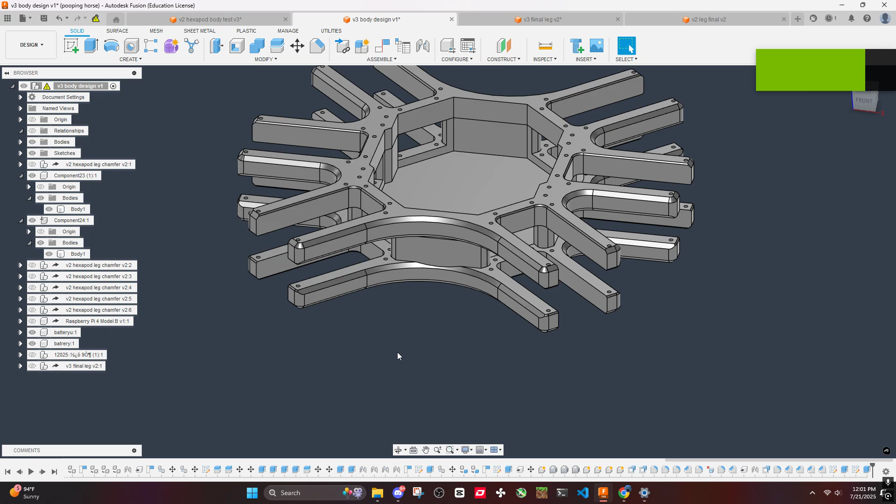Okay, so we have a new problem. Before we do the inverse kinematics, we should probably fix this design issue first. Let's just do a finished sketch for now. So this is a pretty major problem, and it's pretty hard to figure out until you've printed it out, which happened. If you look at these two screw holes, how are you supposed to put a screw through here? You can't put a screw through here.

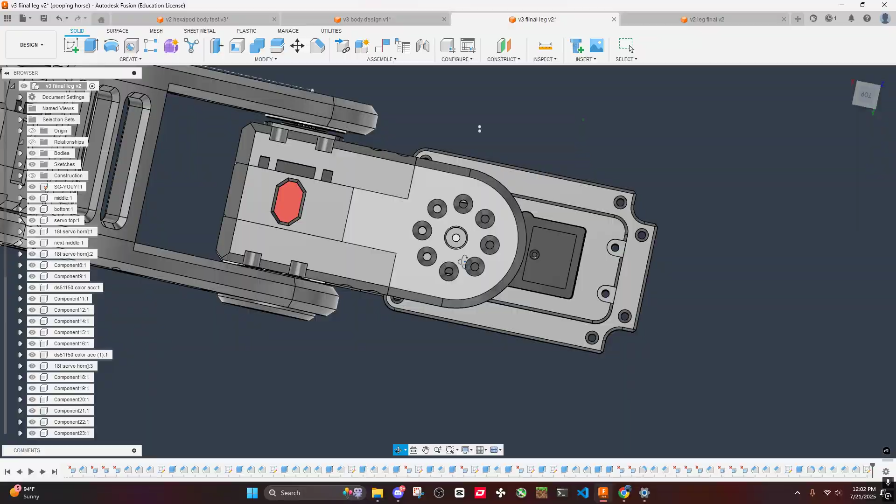So we need to either design something so that we can put a screw through here, like a cutout, or we can make a complete new design here. So there's two options. We can make a small cutout in this, or do what I was talking about earlier. What should I choose?

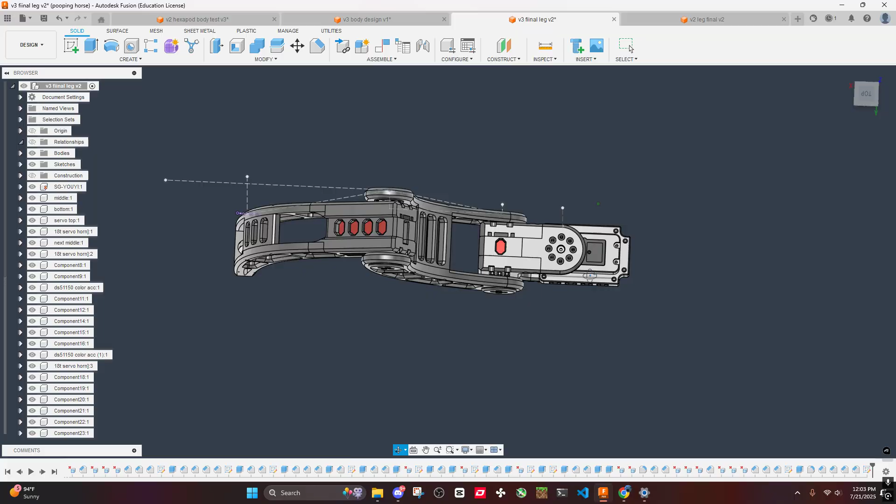I'm not sure, to be honest. I feel like doing this could and would be potentially easier and faster, but it would look a little wonky. So what I think I'm going to do is actually change this design slightly. This will take a lot longer, but it will actually help with the overall structural integrity of everything too.

So what we need to do here is delete all the chamfers here. This is why doing the chamfers at the end and everything else like that at the end is very important. But let's see here. Let's get rid of sketches. This is quite difficult to explain, but I think as I do it, it will make more sense.

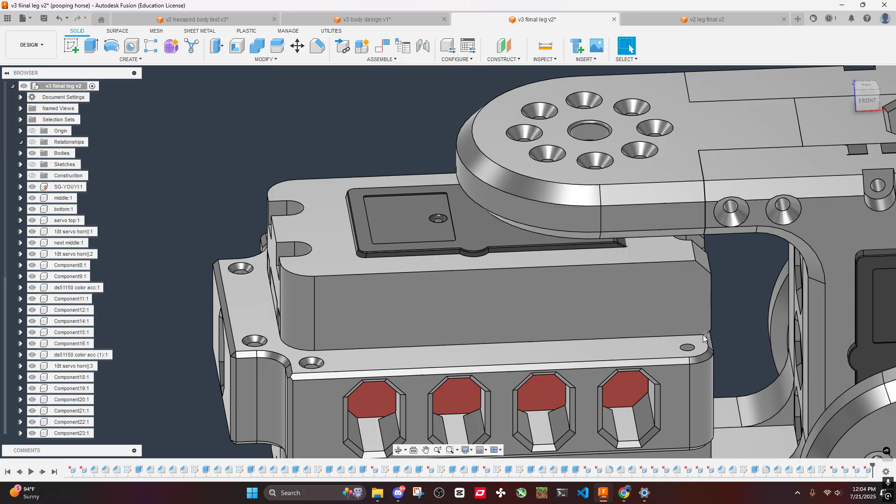Where is that? I'm gonna delete this. Okay, so the design is right here. This is what we need to do. From the inside to the outside should be 13. And we don't need this anymore. Let's get rid of this for now. So 13, let me think.

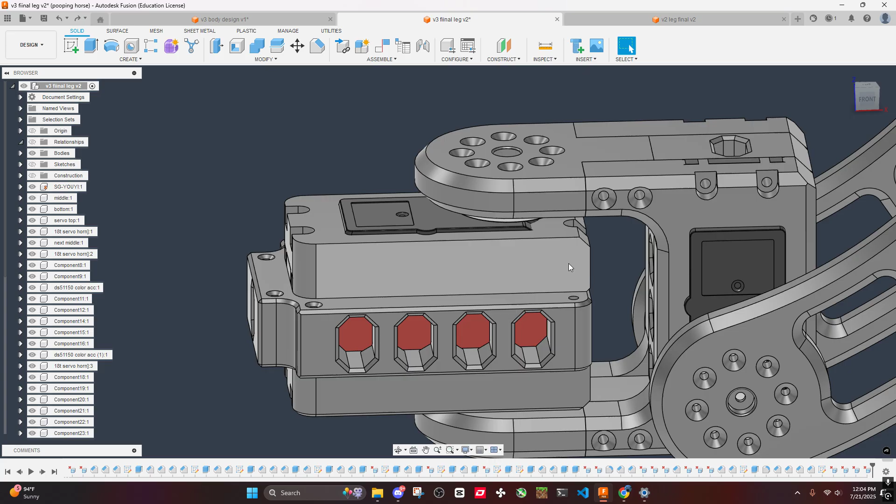So we need to extrude this by 13. 13 by 10, I think, is what we will do. Should we do 10? I think 10 is good. So, create sketch. Pause before we do that. Let's actually get rid of this too. Where's this? Okay. Nice. This is what we wanted.

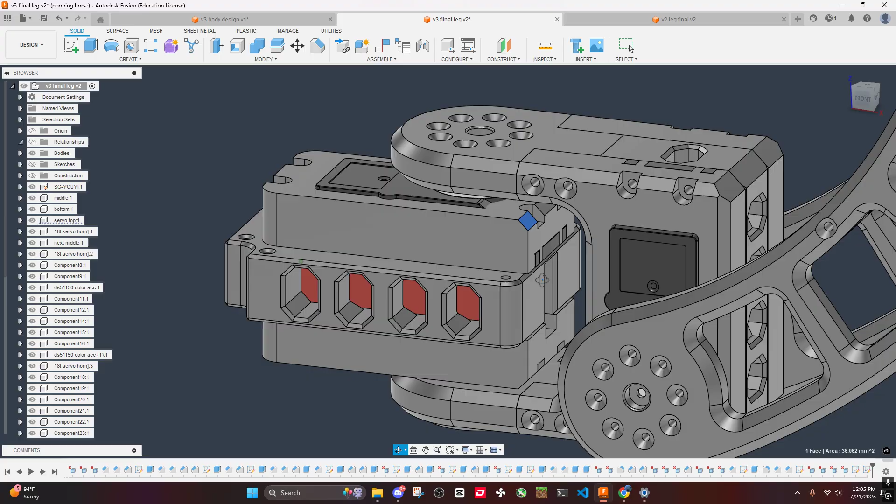Okay, so now let's do a create. Let me think here. We should probably get rid of this too, obviously, to be honest. Yeah, let's do this. Create sketch and okay, pause. Let's get rid of this too then. That's quite far back. Should we get rid of that? Or can we do it some other way? Let me think. We should probably get rid of it. Where is that?

There's a lot of small things that need to be changed for the overall design to be good, and I don't want to cut any corners. There's a warning, great. It's a warning about a compute failed. Okay, where, compute failed? It looks fine. I'm sure it's okay. So now let's go ahead and do it. Let's get rid of this for now.

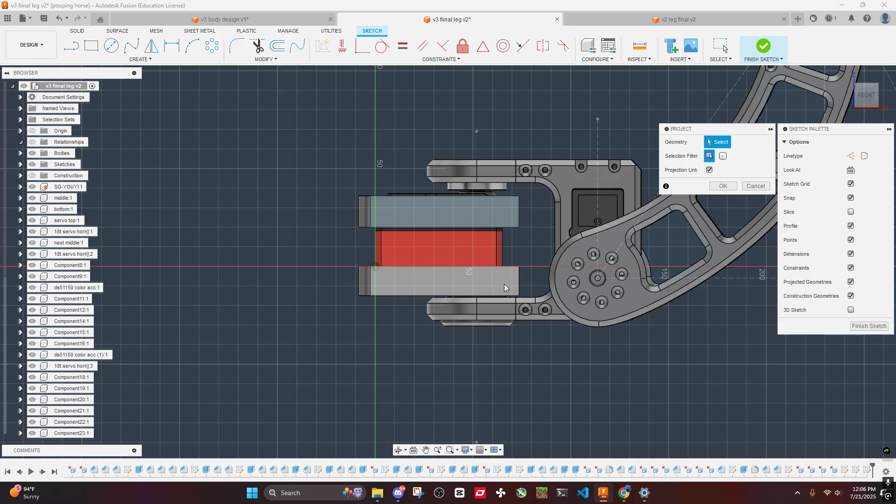Create sketch. Do a project of this also. So let's do it like this and then make this 10. Oh, 10 looks a little short. Should we do a bigger number than 10? I don't think we should. We don't need to because the screws will be harder to come by. I think 10 is plenty. Let's see here. So click.

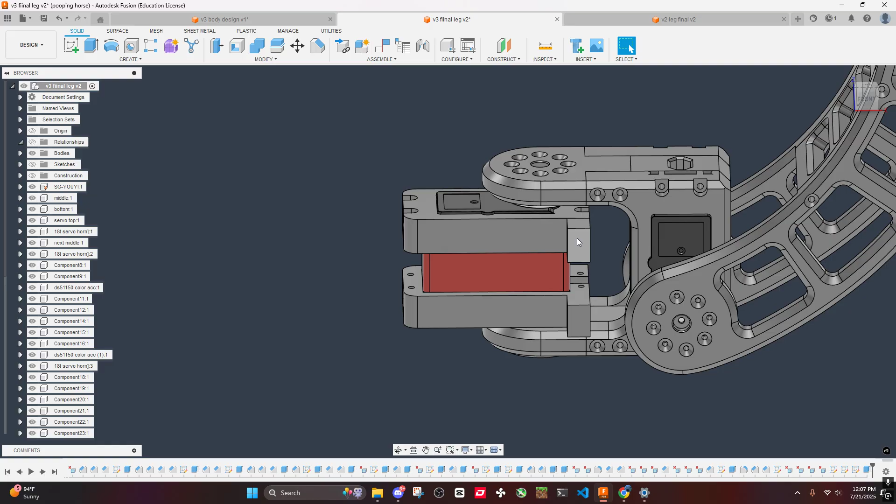Okay, I don't know why it's doing that. That's weird. I don't know why it's clicking the entire thing. There, there. Extrude this out 13. Wait, what did I just do? Why did that happen? Okay, so they're not the same body for some reason. So let's make it the same body, this one and this one. No, the target body is this. This is, okay, there we go.

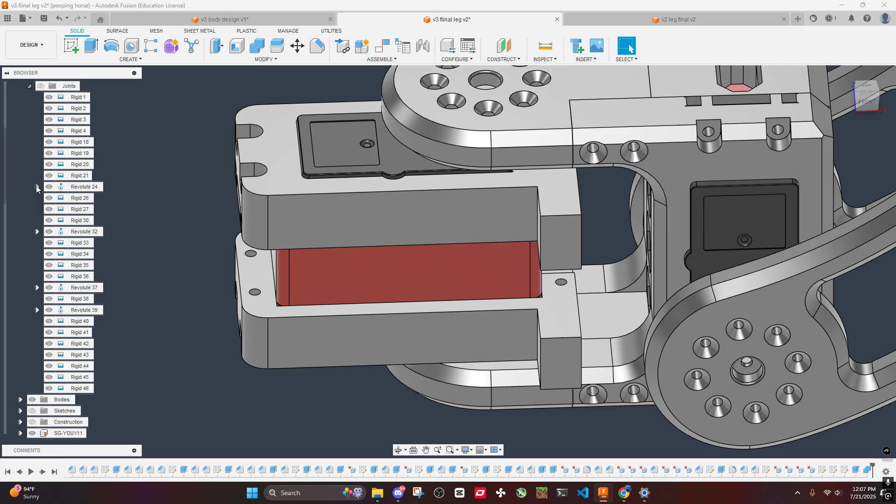This is a pretty interesting looking design. So we'll have fillet of 5. Let's do relationships and make sure everything still fits properly. Should be the first one. Unlock this right here. Okay, so if we did a, let me think.

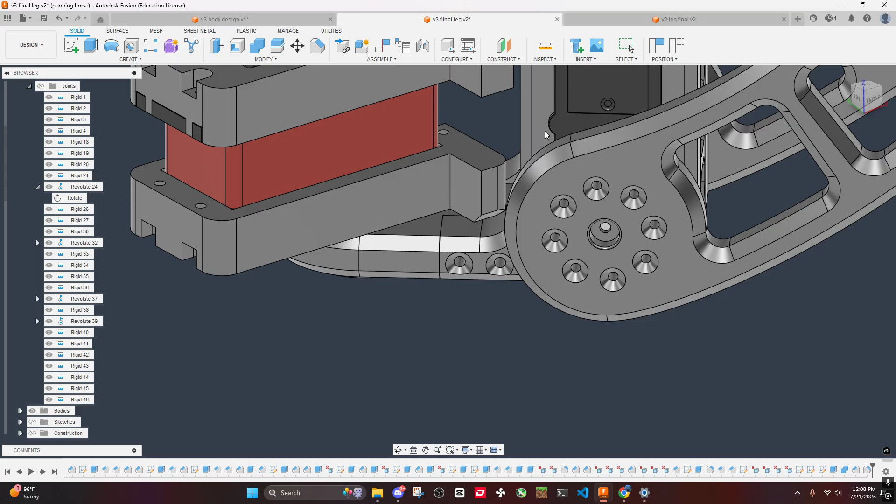The bottom will have a chamfer 3. This has a chamfer, wait, yeah, this has a chamfer 3. So let's do a chamfer 3. And this will have a fillet of 5. So now everything fits just like we predicted, I think. Yep, that's awesome. Alright, so let's get rid of those fillets and chamfers for now.

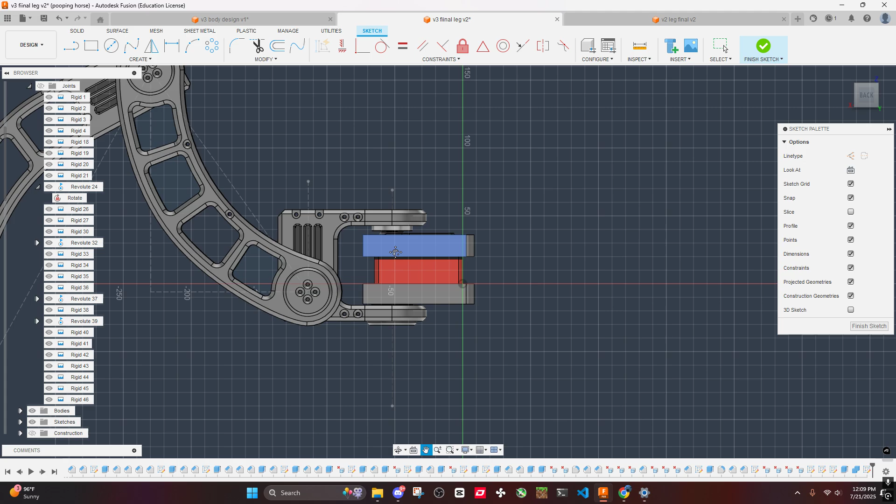And lock it, and do the same thing on this side. From here to here, and we need to do 10. Nice. Let's do project. Extrude 13. For some reason this didn't join again, which is not what we want. But there we go, fixed it. Easy, nice.

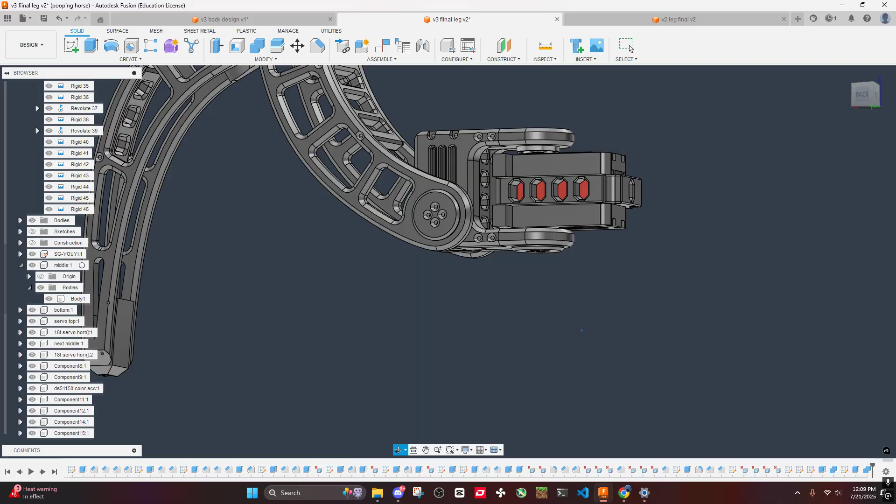And now we can, where's the middle? Middle, bring back this body. Okay, let's start. Okay, now that we have this, let's not do anything yet. But let's fix this design, which is gonna be a pain.

Copy, paste. Copy, paste.

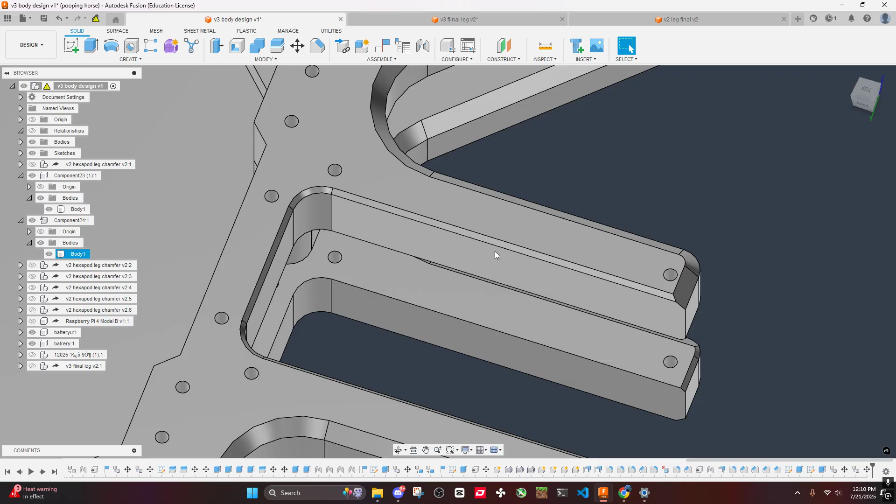Alright, let's just start fixing it up somehow. Should probably get rid of all this. Should we? I actually don't think we need to. Let's do a create a sketch. Okay, wait, this might actually not be that difficult, I think.

Let's see, so we need both of these to mirror everything. Yeah, this is actually not that difficult. What we can do is just something like this. Go from here to be 10. Okay, yeah, this is not bad at all. Okay, what is this?

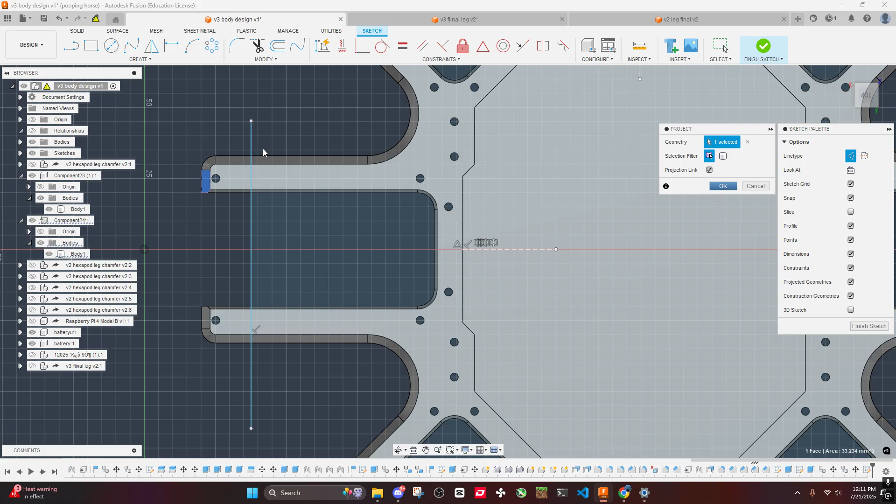So just mirror this across here, and then mirror this and this across here, and then do one more mirror. Before we do that, we need to create a, we need to do a project. This to this, 10. Okay.

So now we can just do mirror this across here. Okay, that's not what we want. This is what we want.

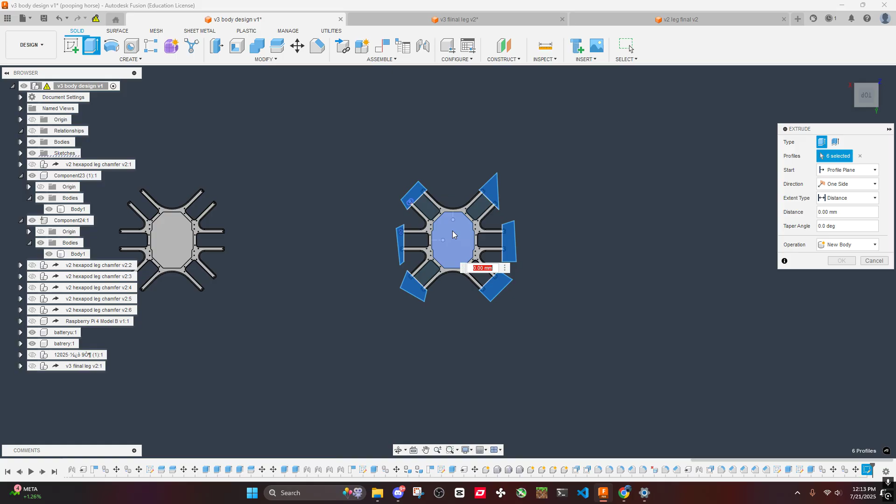Make all of this construction. So now we can select everything and just cut us straight through all of my hard work. Oh my goodness. Okay.

Alright. This should actually make it stronger too because it's now shorter. My goodness. Okay. Great. Look at this amazing, absolute amazing thing that I did here.

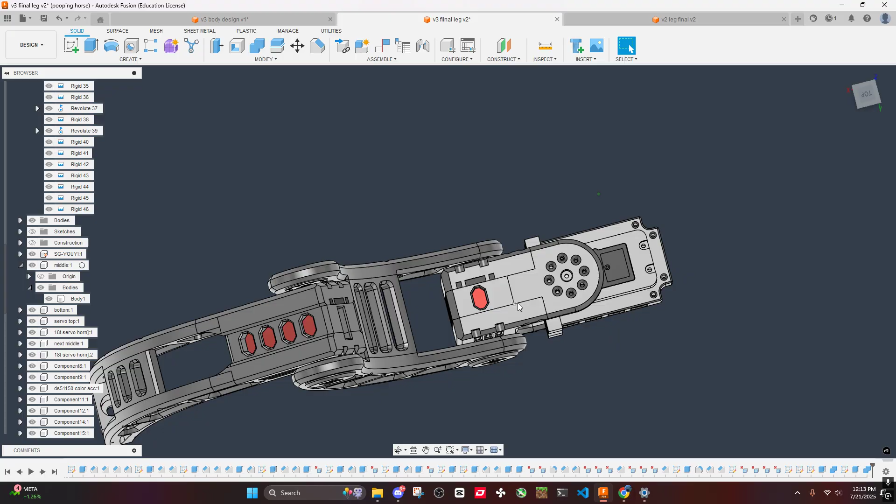I don't even think we need chamfers or anything on any of these edges, except for just do maybe like a, I think doing a chamfer of 1 will be good. So that'll just attach to here, and then we'll have, see what we can do is we can move this out of the way and screw straight in this way. Yeah, that should be pretty strong too, I feel like.

Okay, so let's check everything one more time. From here to here is 16. From here to here should be 15 now, yep. So let's check, wait, what am I looking at? This one. The top, this should be 16. Yep, this should be 15. Yep. And from here to here should be 13, and this should also be 13.

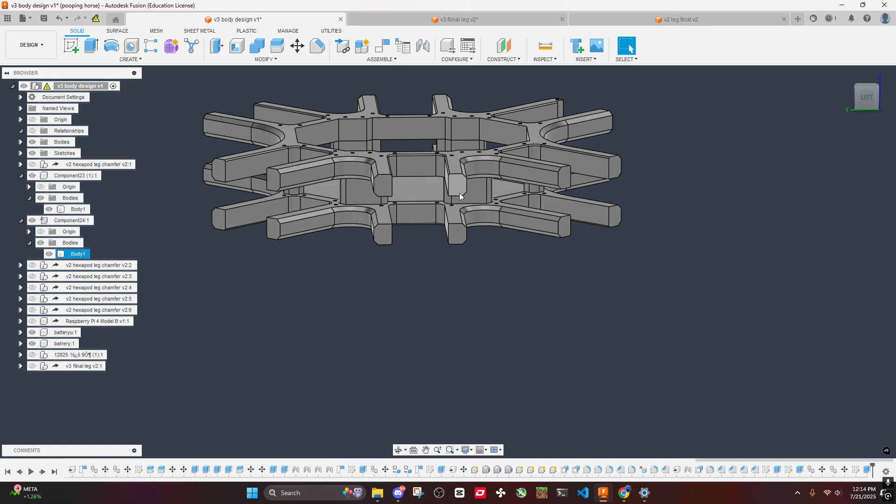Okay, so in this case, we can just go ahead and, okay, I'm trying to think what I need to do. I'm trying to think, should I put the hole all the way through? Would that make it stronger? Oh, add more walls. I think it would actually be stronger. Let's see.

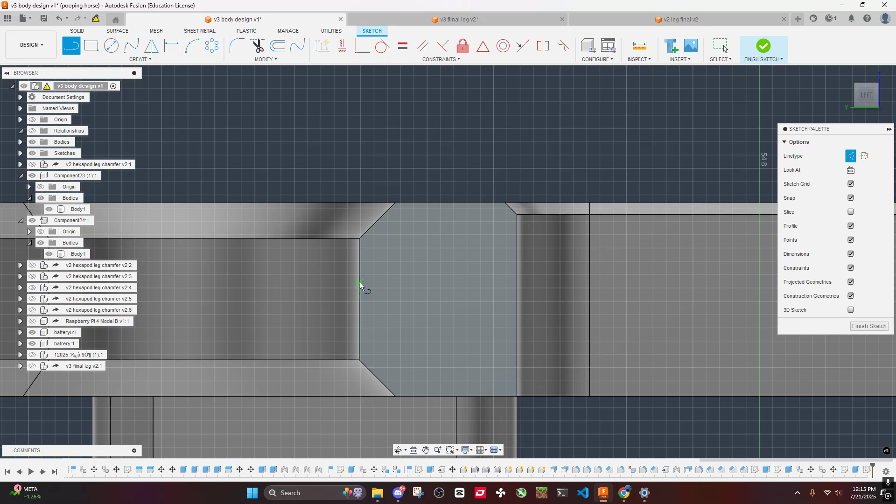So the question I'm wondering is, should I do it like this or like this? Or just go until right here. Would this be stronger? That's a good question. Okay, so we're gonna have walls, walls, walls, infill. But if we did this, we'll have walls. Okay, I think this will actually be stronger. This will be good for us.

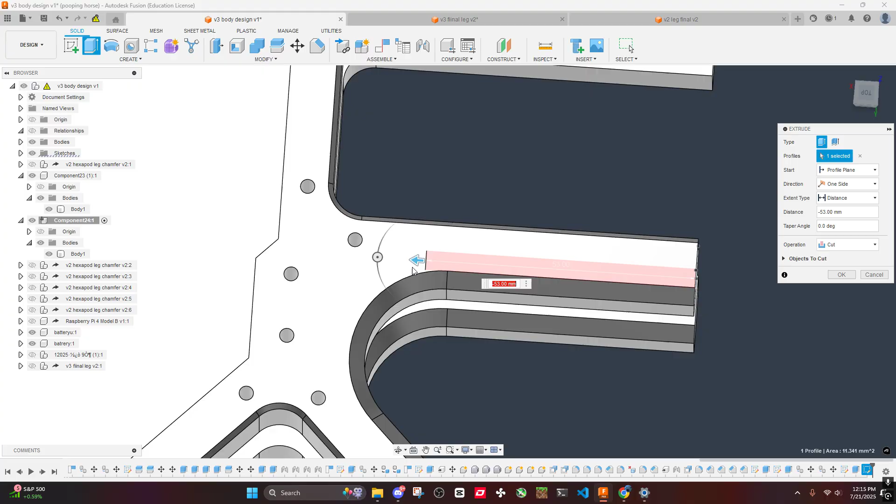To extrude this all the way through, and we can perhaps even mount something on the inside, which we can't, because this is at a wonky angle. So maybe we can. We can have something here, and then we mount it. Okay, let's go. Yeah, let's just go all the way through, maybe.

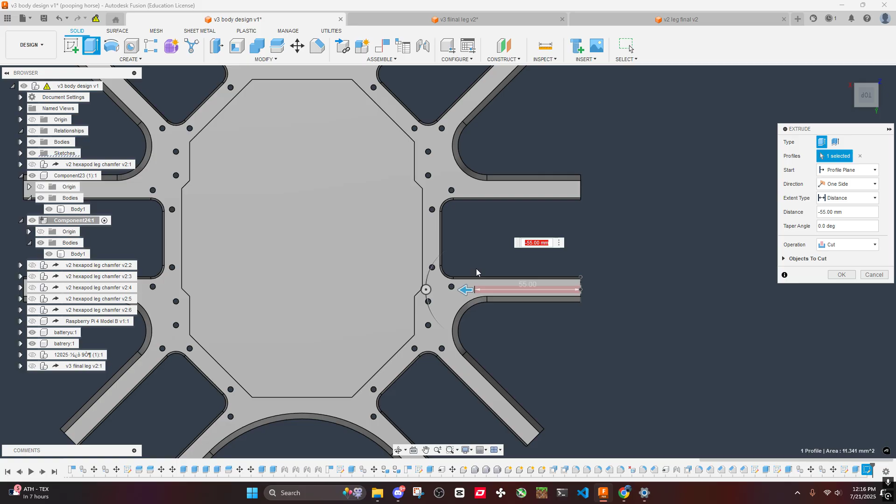Or maybe we can just do like 60, where we're somewhere around here. Negative 55. Maybe somewhere like here, because I feel like if it breaks, it won't be like right here. Break right here. So if we go past this point, negative 62. Negative 65. Negative 60. I think negative 60 is good.

Yeah, let's go ahead and do that on all of them. Project, project, project. Click OK. Let's see, can we go from here to here? We can.

Why do we need to do that? Okay, so we can find the middle. And then we can go from this point to this point and find the middle here. Mirror this across this. And then mirror both of these across the middle.

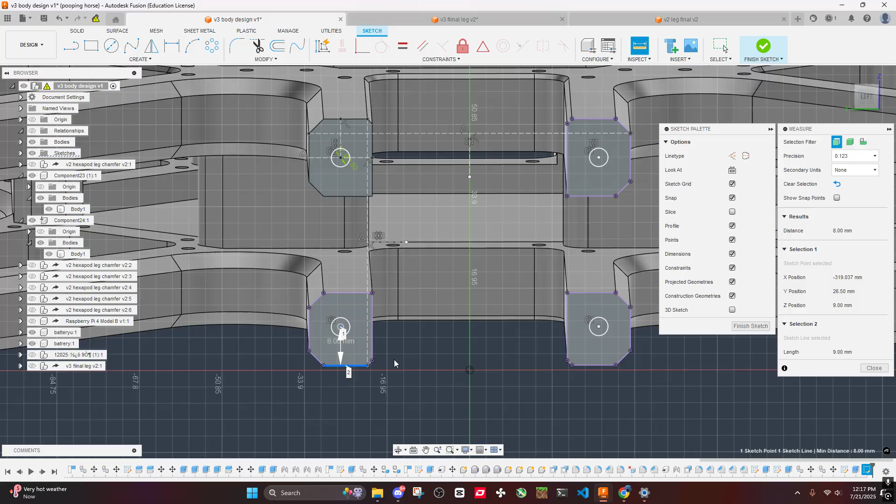Okay, before we do this, let's check from here to here, 7, here to here, 8. So that's not correct. Something is off. Here to here is 8. Here to here is 8.

So why is this? Oh, wait a second. Wait a second. We can't mirror this across, I don't think, because that won't be the center. Okay, that's not what we want. We don't need this or this. I think we're just gonna have to do it manually. No, that's not what we want. We want to do it on... This isn't the center either.

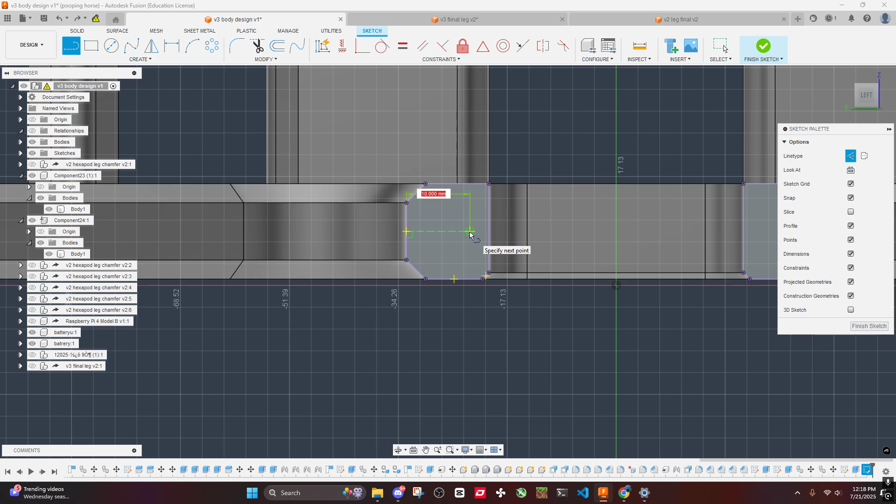Wait, no, this is. Okay, so we need to do it like this. We can't do it on this line because there's not a fillet here, there's a fillet there. So we need to do it here. This is why you need to do the fillets after everything. Which is kind of annoying, but I guess this is okay.

Now we can mirror this across here. Looks pretty centered, looks pretty centered. Yep. Now let's select everything. Extrude at -60. Where is everything at? Okay. Yep, that looks pretty good. We can click it OK.

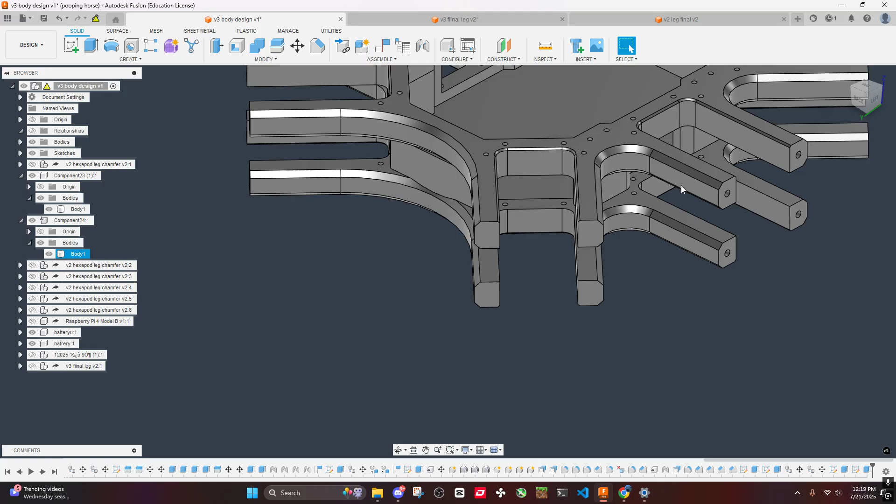Okay, now we need to do this. Can I just extrude it all the way through? Would that be easier? I think it would be, so we don't have to do it on the other side too. Either way, we gotta do it here though.

Extrude. Yeah, I think I'm just going to go all the way through with it. This will make it a lot... Okay, that's not what we want. That's a pain. Alright, let's just extrude it here then, and then we can do the same thing here. What? Oh, I need to get rid of this and this.

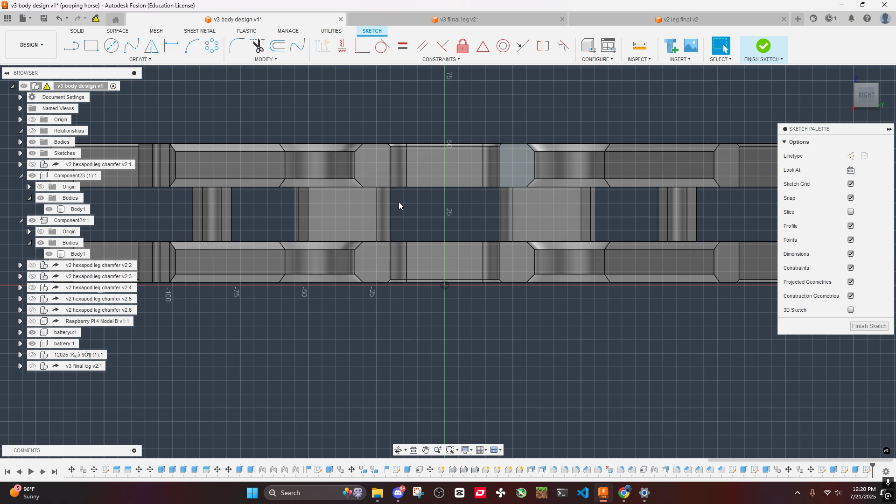Okay, before I do everything, let me finish the sketch. Go to this sketch here, and can I copy? Imagine this works. Okay chat, just imagine this works, okay? And then I can go to this sketch now and do a paste. Dude, no way. There's no way. I could have done this all along. Are you kidding me? There's no way that worked. Dude, what?

So all I have to do is just... Oh my goodness. That is crazy. There's no way. Wait, what is this wonky... what is the... Oh, I forgot to...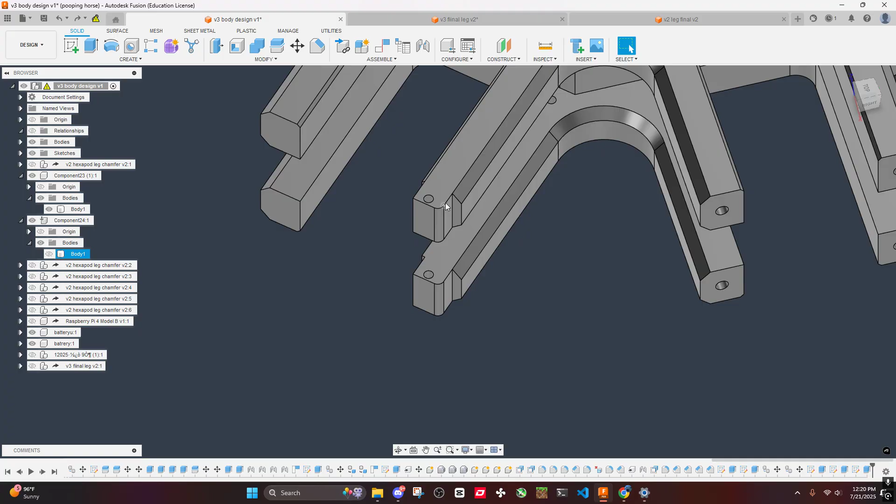Huh, okay wait. Not here, I think it's before this. Okay, where did I make this happen? Here? So I forgot to select this. Now I should be good.

Okay, if I do this and it works, I'm actually gonna be so happy. Where is it? Right here. Control paste. Where is it? Okay so...

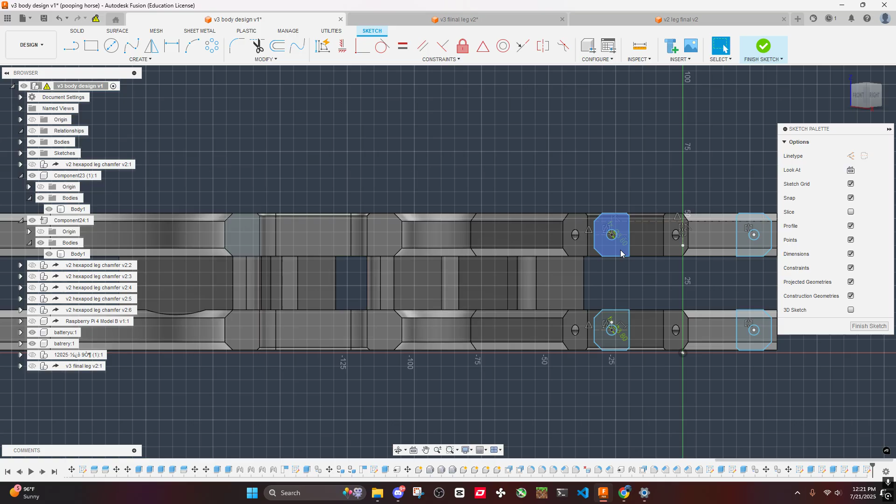Is there a way we can line it up? Okay, that's not what we want. Okay, control paste. Okay, so it should be on the same plane. If I can just line it up. How can I line this up? Because this is not lined up.

Negative 137. 136. 137. 138. Okay, so let's see if there's a way I can do point to point. Maybe this is what we need.

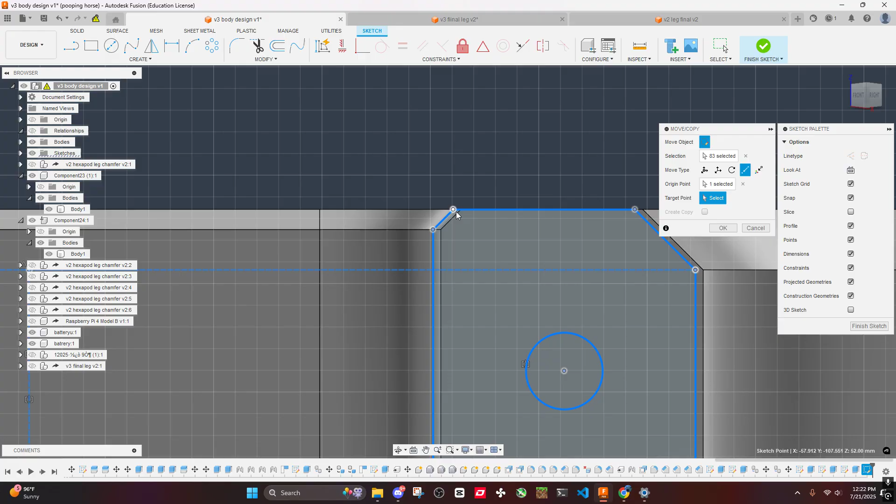Origin point would be this. Target point would be the... Oh my, wait a second. Wait a second, did I just... did I just big brain? Pause, did I just figure this out for real? Wait a second, wait a second. This is amazing discovery. I definitely need to start knowing stuff like this is obviously there because there's no way people are doing what I was doing, manually doing everything instead of they can just copy and paste.

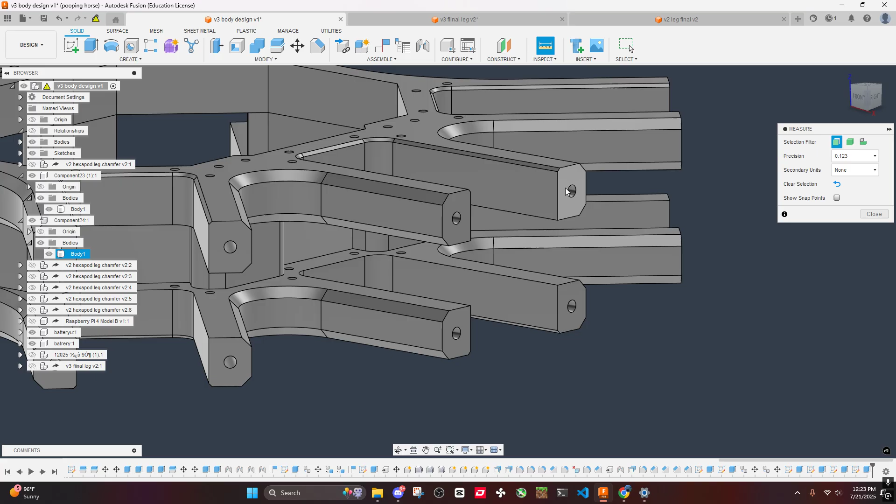Okay, let's actually check. This to here is 6.1. Okay, if this is 6.1, everything should solve. 6.1 and 5.6, 5.6. I actually, 4.6. That seems like a pretty normal number. Dude, that is crazy. All right, let's just go ahead and do all this with the same method, control paste.

And then now we can do a point to point, point to position, point to point. So the origin point, we want this point to line up with this point. Wait a second, that didn't work. Why did it go all the way over? Hello? The heck?

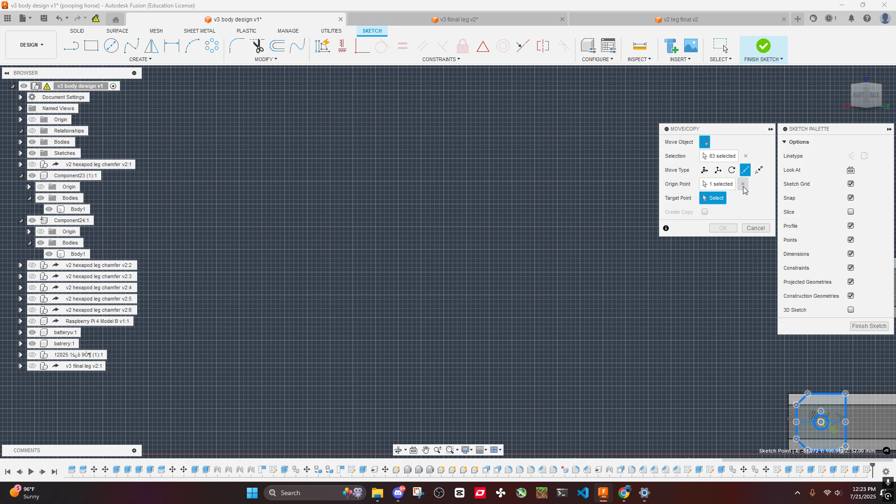Okay, let's delete this. So the origin point, we can just select this point and do this. Okay, that works too. Nice, okay.

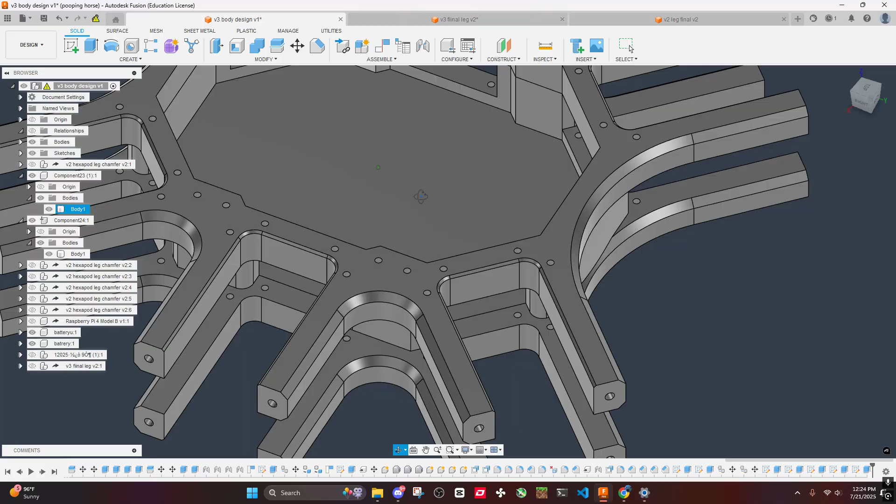So you're telling me I could have done this entire time and I didn't. I kind of knew that something like this is possible, but I just couldn't be bothered to do it, which is not a good mindset. You always want to innovate, always want to improve anything with design, efficiency, blah blah blah, which is what I'm doing now.

Extrude to negative 60. This is going quite fast, now that I figured out I can do this.

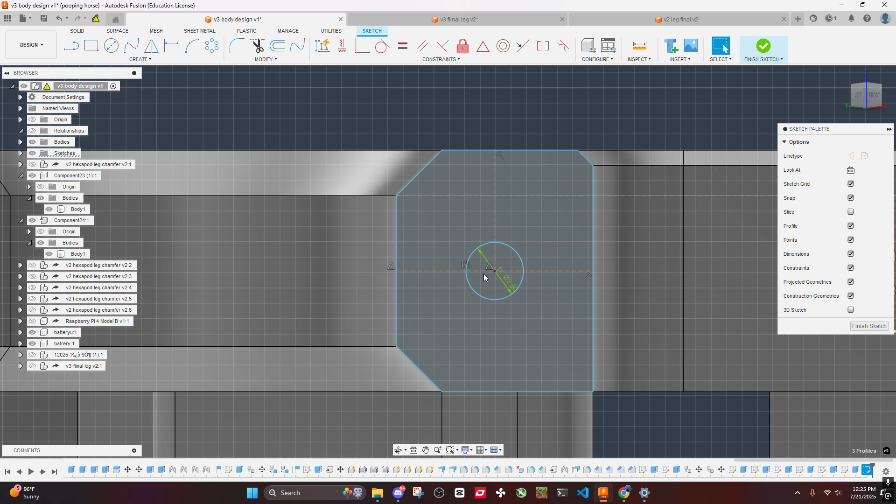Dude, I love CAD, man. I love CAD. Imagine designing all this by hand. Like, how are you supposed to do that?

Everything looks awesome. Okay, now that we have this, let's go ahead and let's see.

We need a chamfer here, chamfer here. Wait no, let me think. Yes, chamfer on all of this. Do we need a chamfer here? We should probably add one here. No, we don't need one here. We don't need one here either. Here, here, here.

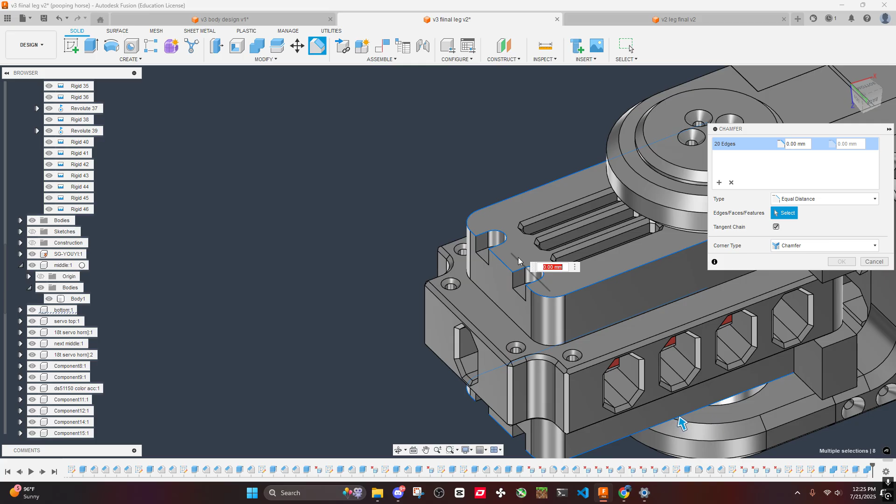Chamfer all to be one, I'm guessing. We're gonna add it here and here to prevent elephant foot. That's a good idea, that's a great idea. That's a great, great idea. Did I do that before? I don't even remember.

Here and one. Awesome, okay, nice. So here, here.

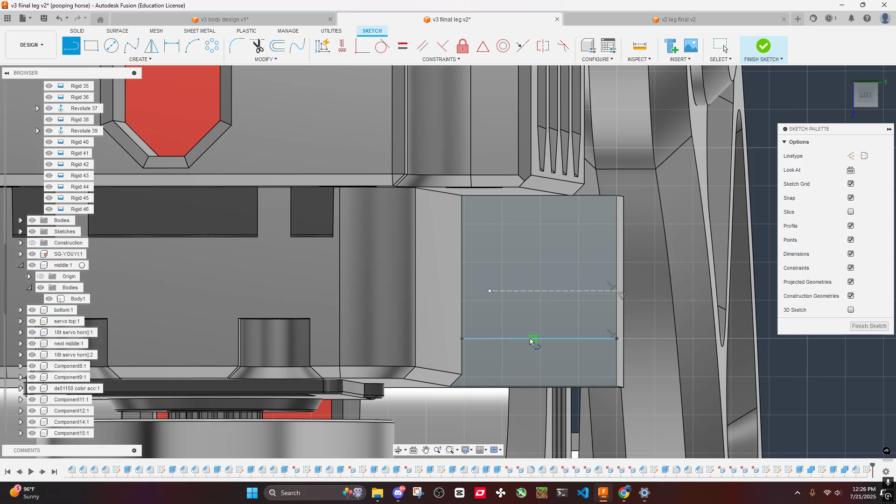Wait, before we do that, let's actually do the... okay, so let's do a create sketch. Okay, let's see, what do we need? Like this. And then like, I'm guessing from here to here. And then from, where's the midpoint? Right here to here.

This needs to be M3. M3. I guess we can just mirror this across. Let's do it right over here.

Okay, now we can mirror this across this line. Nice, and then we can't mirror across here, so let's go ahead and project this and find the midpoint.

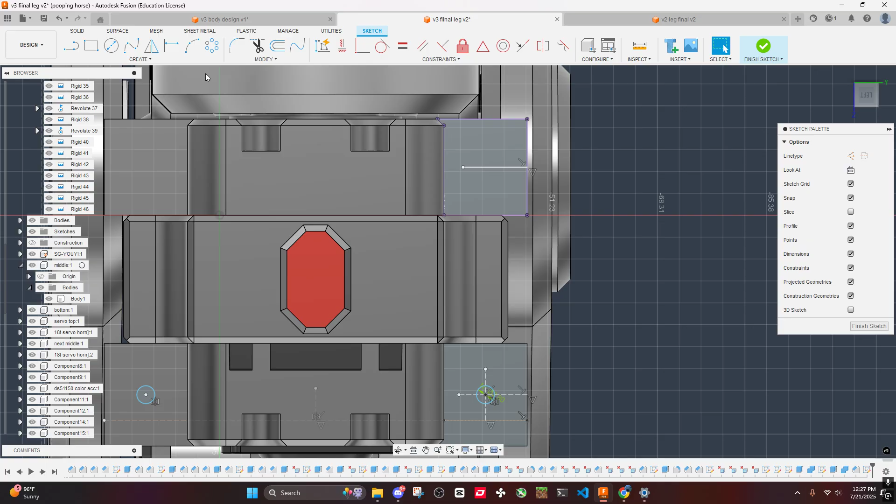Yes, why did I just delete it? Project it here, and to find the midpoint we need to go from here to here, which we can just use this, I think. M3. Okay, I think this is good.

Okay, now let's mirror it. Mirror this across this. I'm going to do from here to here. It looks like 90. Okay, that's perfect. 90 degrees, that's what we want.

Extrude, extrude, extrude, and extrude.

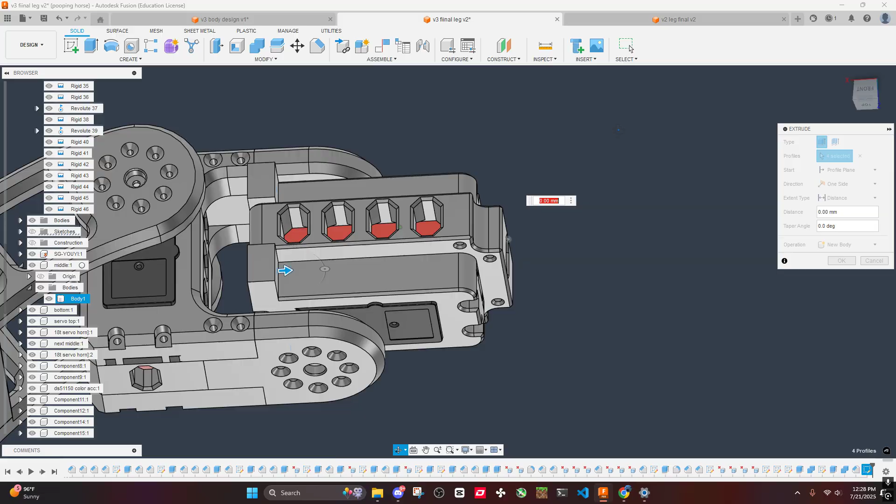Now I just need to check if everything's centered, 6.6. I think that was 6.6 on the other side too. So 6.6. Now this should be like a 4, 5.1. Wait a second. 5.1, is that what it was? 4.6. Why is this 4.6?

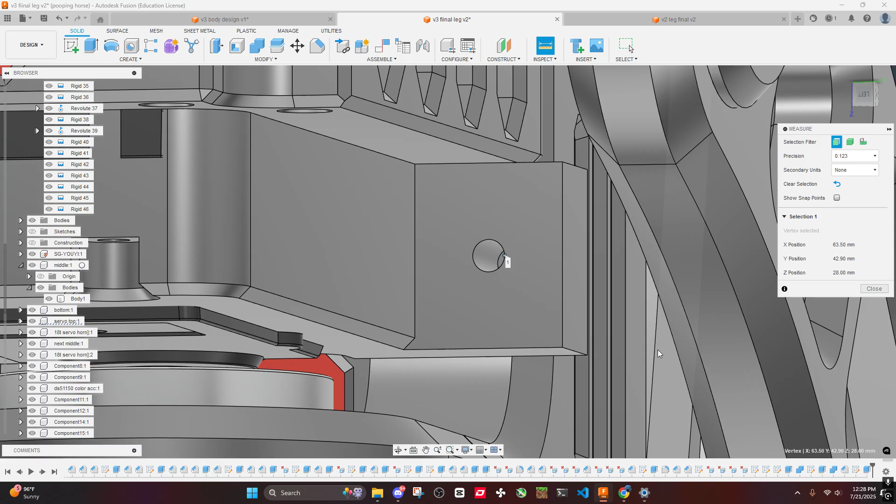Huh, so there's some discrepancies here. Obviously. That's strange, this should have lined up. 5 point... that is so weird. Okay, wait.

From here to here is 13. From here to here should be 13. Okay, then why? Oh wait, these holes are different sizes. Oh my gosh, I'm so stupid. No wonder. This should be smaller than the other one because this is a... okay, yeah, this should work then.

Okay, so let's do fillets and add everything. Fillet, fillet. I was genuinely a little concerned and tripping out. This should be 5.

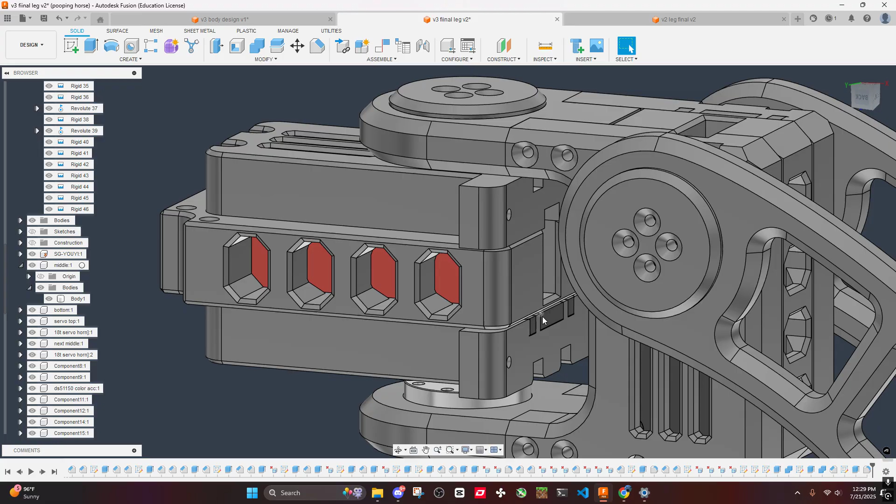And let's see, chamfer here. Okay, so let's do chamfer. Chamfer. Chamfer, and go on the bottom. Chamfer. Chamfer.

So this needs to be what? 3? I believe. Yep, looks good. And let's go ahead and add the fillet back here. I mean the chamfer back here.

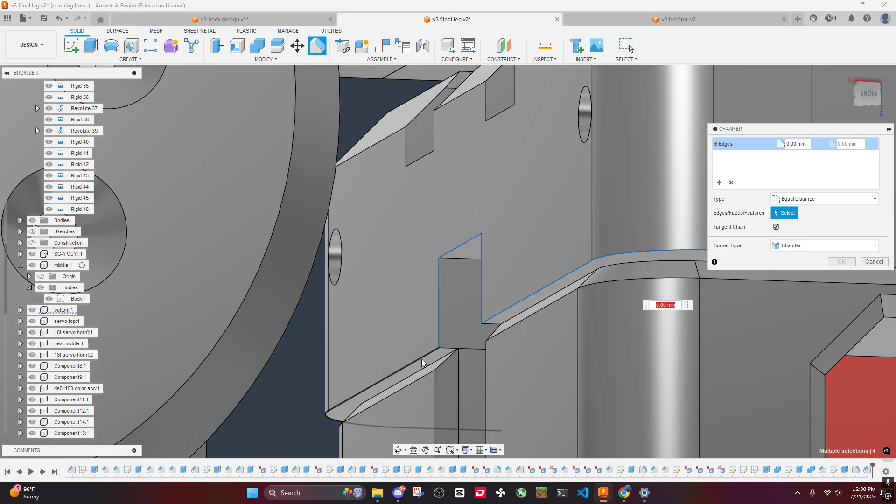This needs to be 1. Okay, not bad, not bad at all. And then the chamfer down here. 1.

Pretty good. Obviously, we need to add some sort of thing. Okay, let me think. Countersunk or not countersunk? I think we should use countersunk here. Can we still do it? We can, awesome.

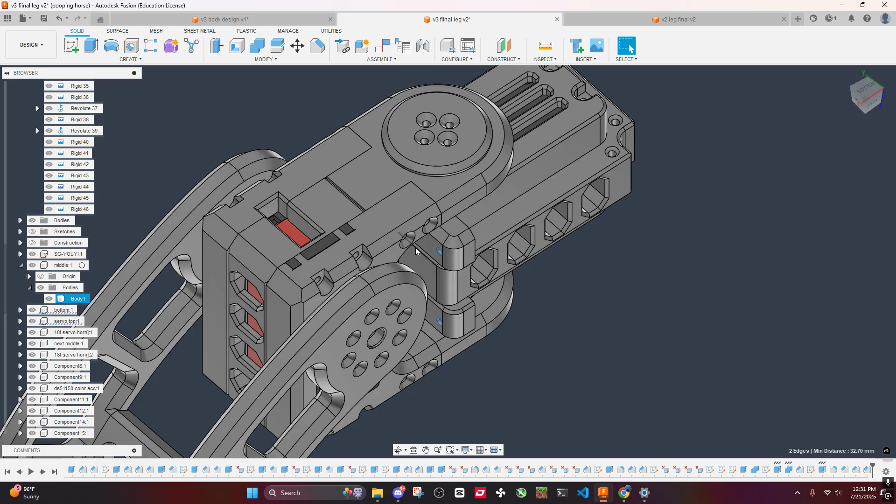Good thing about parameters is I don't even need to remember what it is, and we can just add it. And because I remember adding it in. So M3 chamfer, yep. Okay, I think it actually needs to be bigger than 2, to be honest. Maybe like 3 or something. We'll change that later. Now this goes in here.

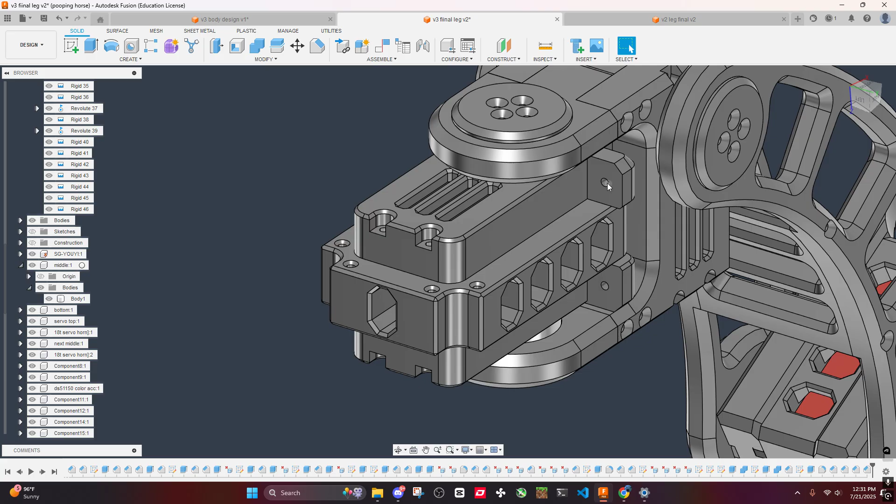And yep, this looks pretty good. So now we should be able to just slot this straight on. Actually, let's do that, why not. Let's see.

Wait, where is it? Oh wait, insert. Let's put this actually. We don't need to put it on toolbar, we only use it every once in a while. So...

V3 final leg, select. Save, save.

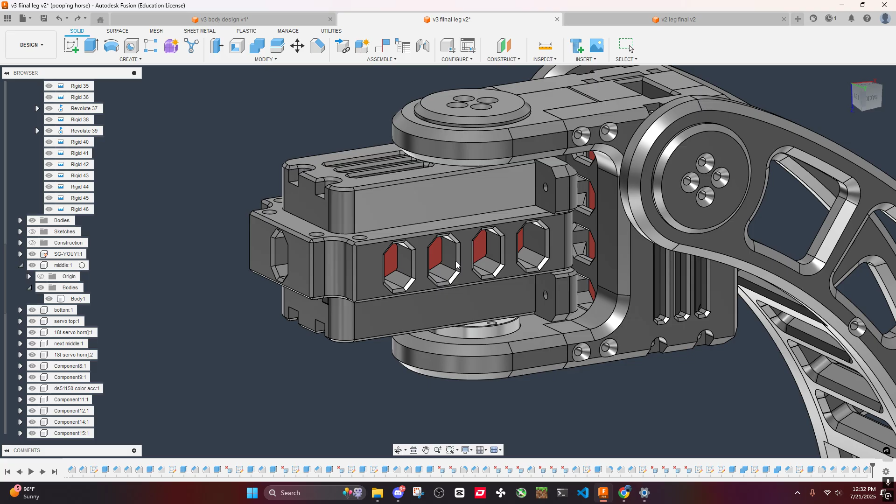This should actually take some strain off of this piece and puts them on the top and bottom, which actually distributes out the force, I guess, the mounting angle perfectly.

Actually, before we do this, would adding a fillet here be a good move? That does look very wonky though. So I think we need to.

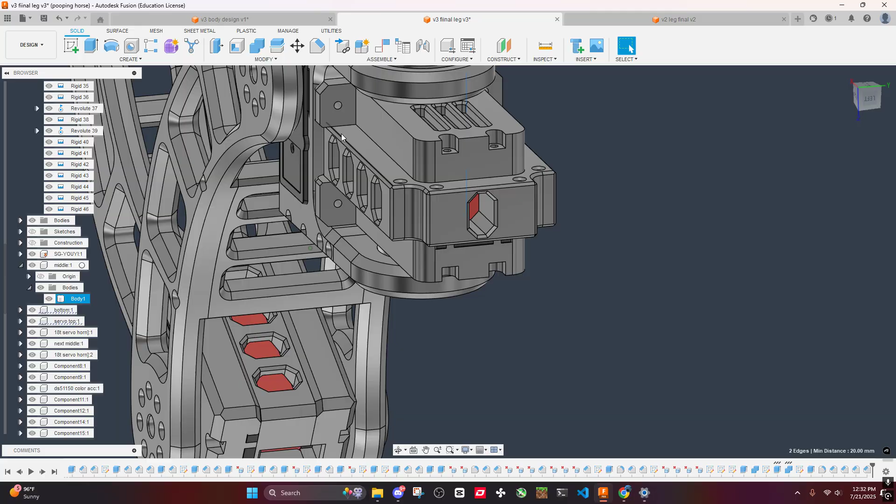Will adding a fillet there be a good move? I actually think it will be. I think it will be. Let's go ahead and delete this then. And add a fillet here and here, so let's do a fillet of 5 and see what it looks like.

So it doesn't interfere with that. And it shouldn't interfere with the bottom either. Okay, this is perfect, this should make it stronger too.

And here, we can add a fillet of 5 to each one of these. So here, okay, let's just do fillet, fillet.

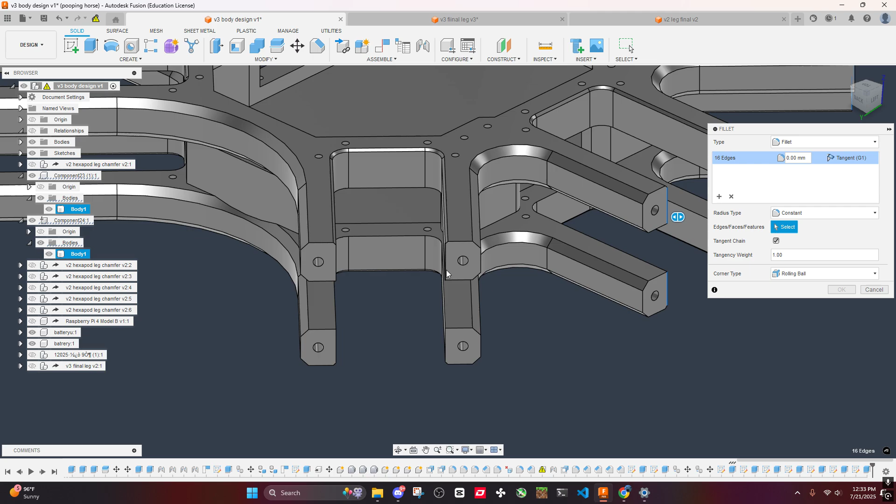And we don't actually need to add any, what's it called, clearances, which is amazing because we can just do a horizontal expansion or a negative horizontal expansion on all my 3D printed parts. That's supposed to slot in here, so it will actually fit perfect. And I found on an Ender 3 or like any Ender series, usually a negative 0.2 is perfect. So we can do a fillet 5.

Okay, why is it not working? Fillet of 5. Okay, this looks very promising. This looks good, I think.

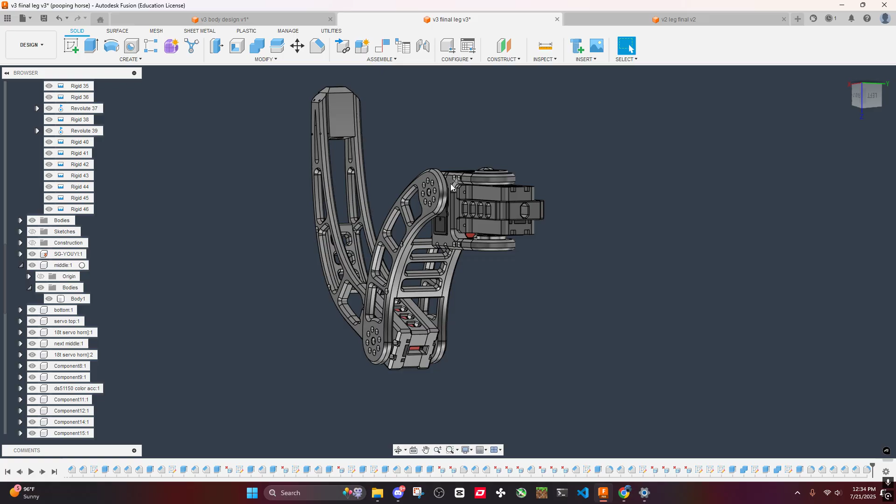And now we can do... that looks good too. So let's go here and construct. Wait, no, what am I doing? Insert. Okay.

Final leg V3, select, and now it's gonna prompt us to save it, I think. Wait, why did it not prompt us to save it? That's strange, is it gonna work?

No, I think I did it wrong. Yeah, I kinda did it wrong. This is the wrong one. So...

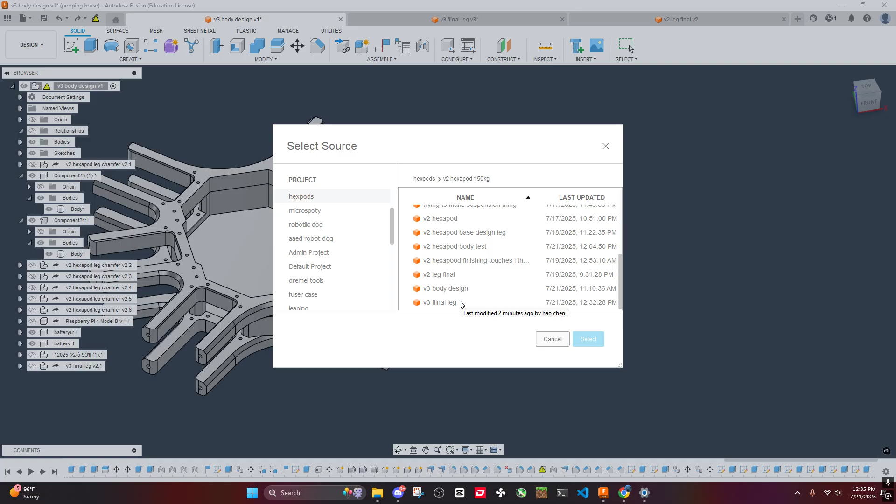It's V3, not V2. I think I clicked V2, so inspect, construct, insert. Okay, where's V3? This one, right? Yeah, I misspelled it too. This is good. Okay, now it should prompt us to save it, hopefully.

Wait a minute, why is it not working? Okay, let's save this. Maybe if we save it and then do it, it would work. Insert. Let's see. And it still didn't work. That is very strange.

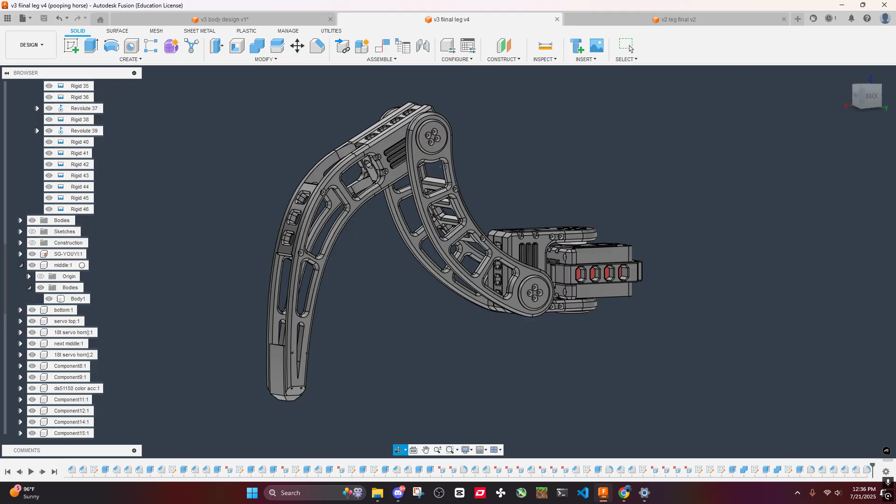We want to put this piece in there. So why are we not allowed to do that? I think it's... I don't know, honestly. Huh.

That is pretty strange, if you ask me. Yeah, okay, I don't know why it's doing that. Last updated, 35. Yeah, this should be good. I don't...

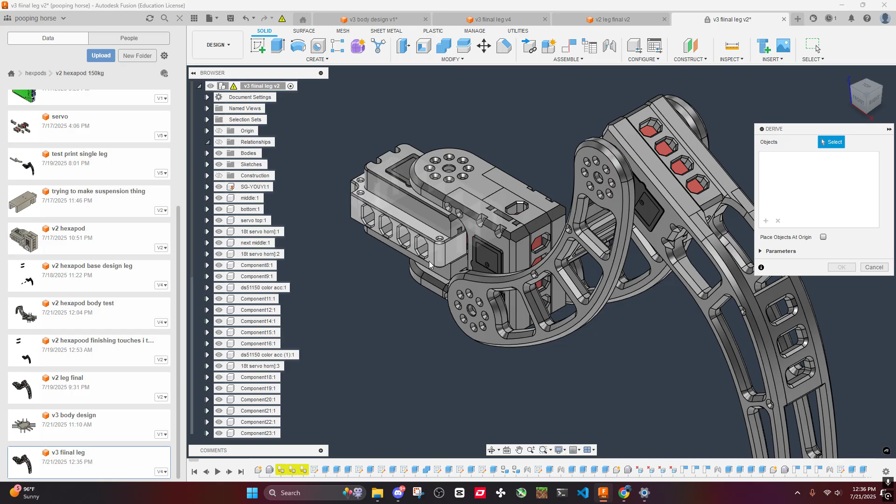Yeah, this is really strange. I'm looking at a V2 here, but it should be V4. I think it might be a glitch. So let's delete this. Yeah, I don't know why it's V2.

This is what we want. Let's do a save as. Let's call this V4 leg final. Now we should be able to do it, right? Where am I looking at? Insert.

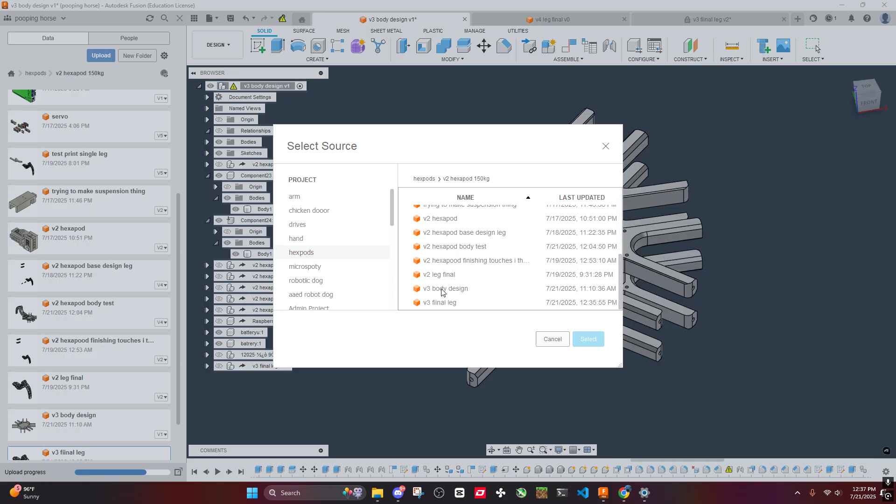V4, V4, V4. Huh, I don't even see a V4. It's not uploaded yet. Okay, now we should be able to see it. Finally. V4, leg final. Okay, please work. Please work. Yes, it worked. Awesome, awesome, awesome, awesome. Very nice.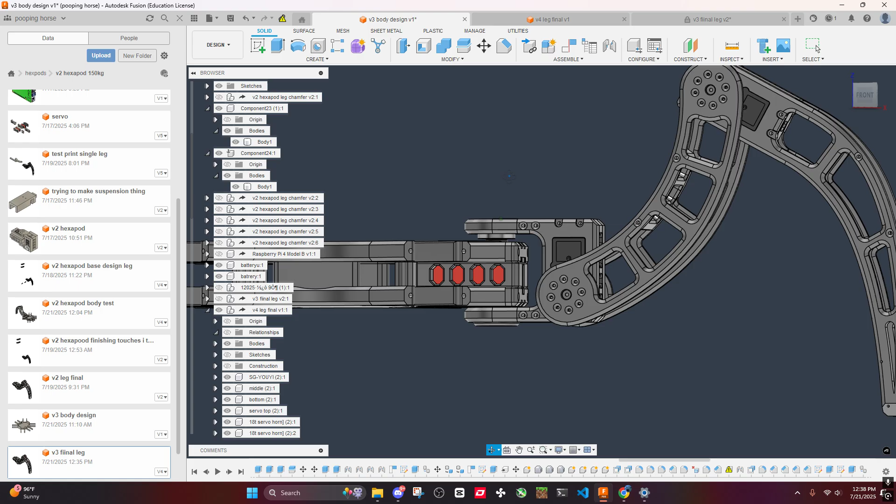Yep, exactly what we wanted. Let's go here and then get rid of relationships for now. I'm gonna join it by this joint here, actually, this time. Everything looks like it fits perfectly. This is awesome. This is very, very nice.

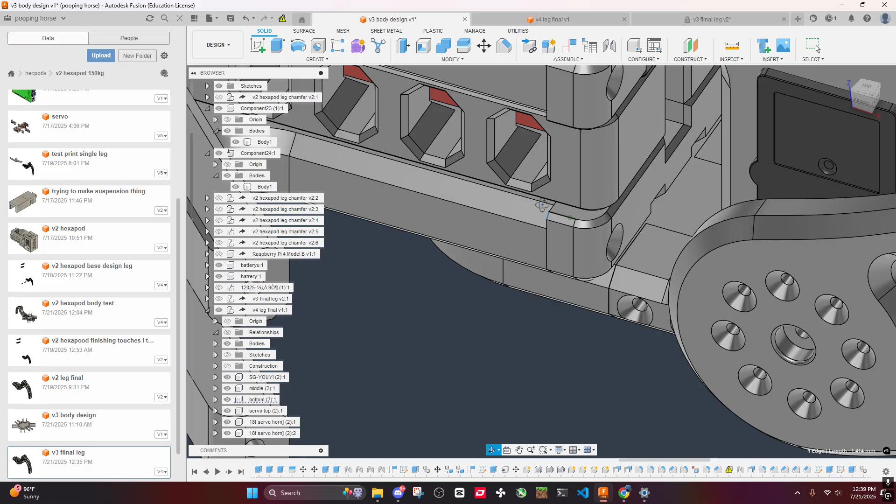Except for I kind of messed up down here. We need to do a... Looks to me we need to do a fillet of 3 here for everything to match up. Unless I can just do another fillet here of 3. If I can't do a fillet of 3, because I feel like that would mess this up. But I think everything lines up pretty neatly. We do have something like this, which we should probably fix.

Let's just fix it on this model. Chamfer, chamfer, chamfer, chamfer, chamfer. So 1. And alright, where is this at? Can we delete this and chamfer? Okay, so it's gonna mess that up, so that's not what we want.

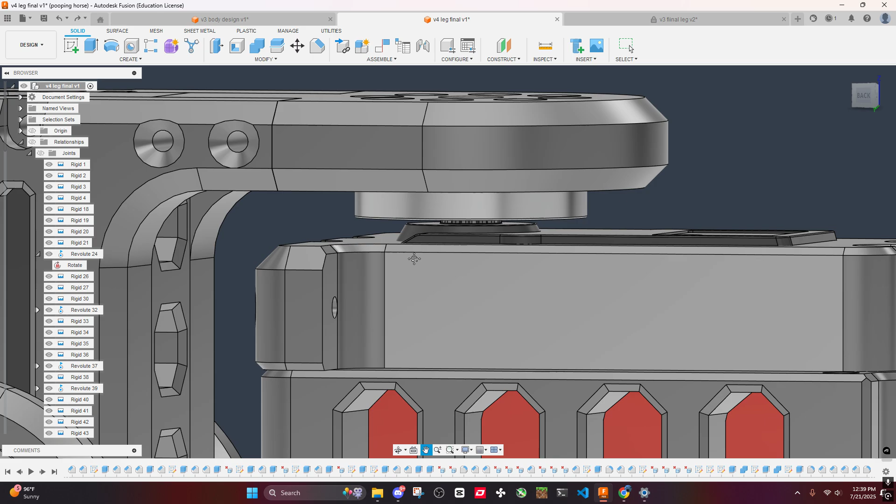Huh, okay, so can I do a chamfer here of 3? I can. That's not what I want. Okay, so this is 1, so we need to do a chamfer here of 2? I think like this, maybe? I'm not sure yet. Yeah, let's do a chamfer of 2 here and see what it looks like.

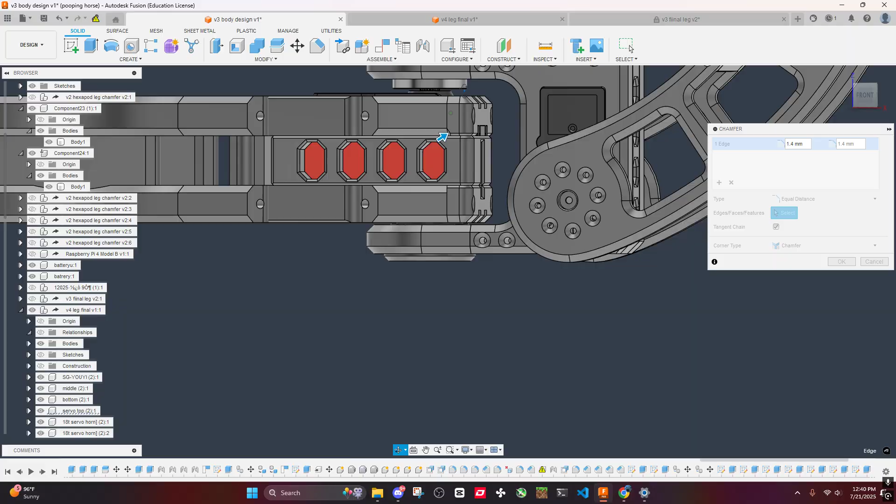Why did it do that? That's so strange. Chamfer of 1, 1.2, 3, 4. 4 looks to line up good. Yeah, I think we're gonna maybe have to do that. 1.4. Okay, so I think we're gonna have to do that.

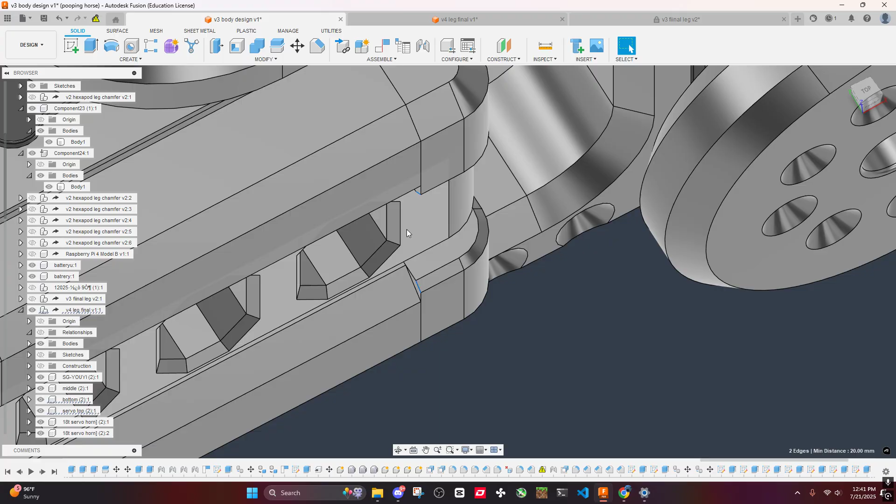So let's delete this and chamfer. Nice, okay. That's good. Let's go ahead and do it here too. So chamfer of 1.4. Nice. Alrighty.

What else did I add? Oh yeah, this top fillet. My top chamfer here, here, here, here, and here, I think. So 1. Okay, I think this is good.

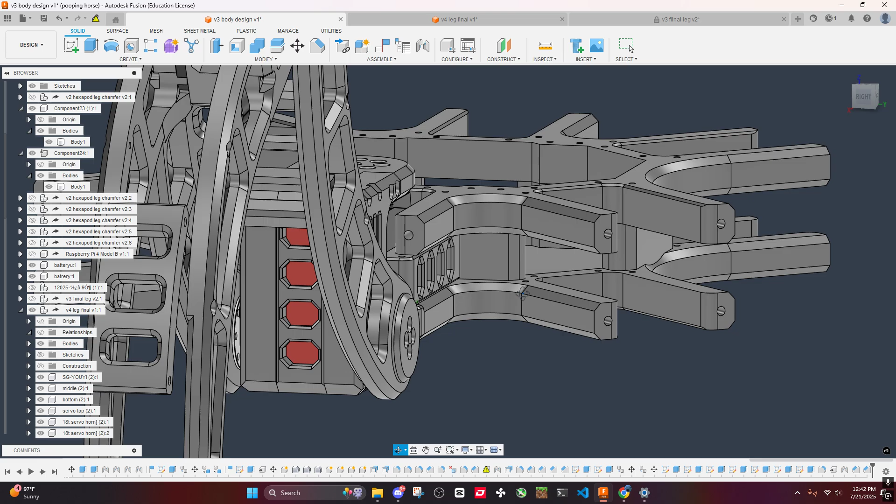Wait a minute, why is there... I think we're gonna have to add a chamfer here of 2, like that. I think that is a good idea. Yeah, so let's get rid of... Wait a minute, what am I... Okay, there we go. So let's actually do that. So here, here, here. Wait a second, why is it... Oh, I forgot to do the bottom, okay.

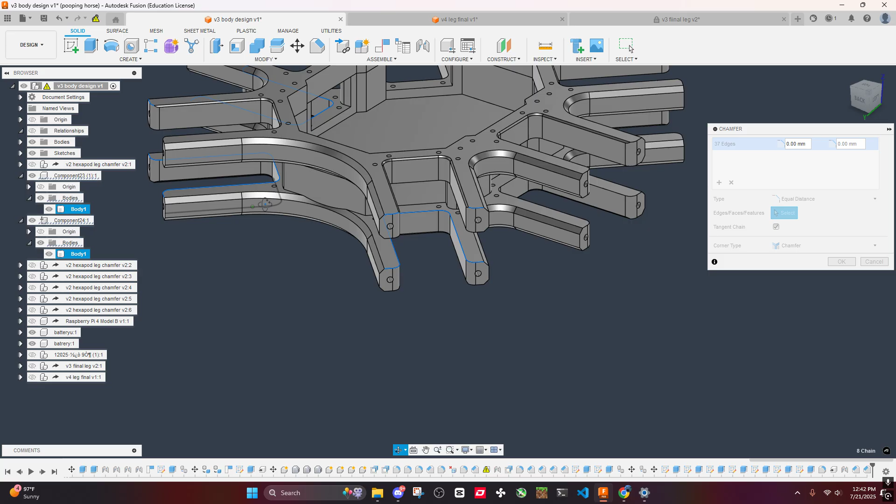Really want to make sure I actually select everything. So each one will have three. 1, 2, 3. 1, 2, 3. Boom, boom, boom. Selected. Okay, we need to deselect this, deselect this.

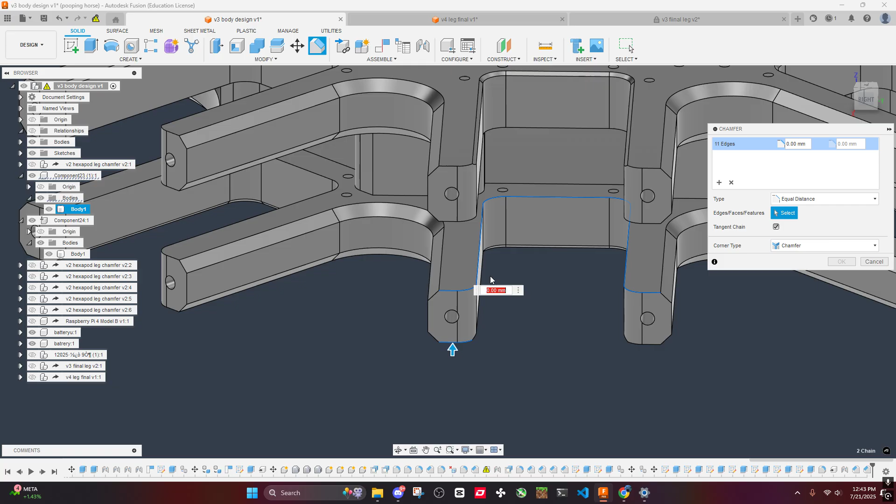Okay, it's selecting a bunch of random stuff, which is not what I want. This is very annoying. I'm gonna redo everything. So 1. Wait a second. 1, 2, 3, 4? No, wait a second, what am I doing? I'm getting a little confused now. Let's see.

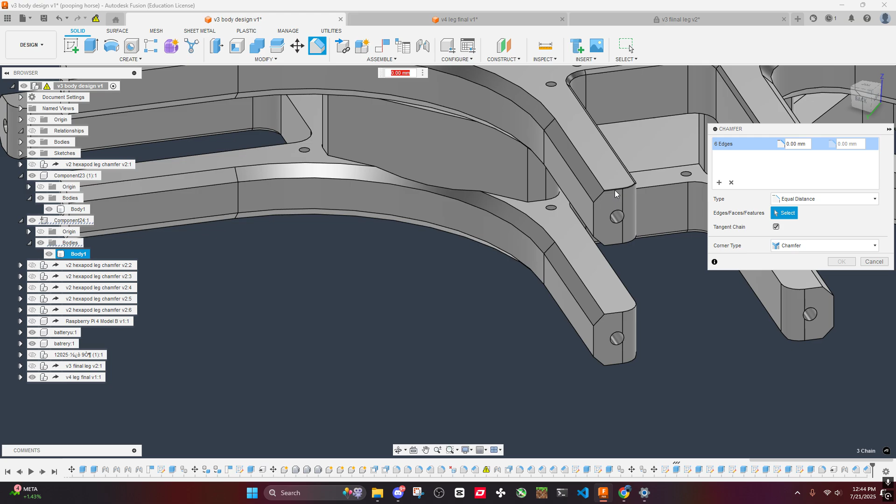So we need to do this top. Or we can just keep it like this. Probably should do the top at least. This one, this one. Nice, okay. If we did it on top, we should probably do it on the bottom. Alright, let's see.

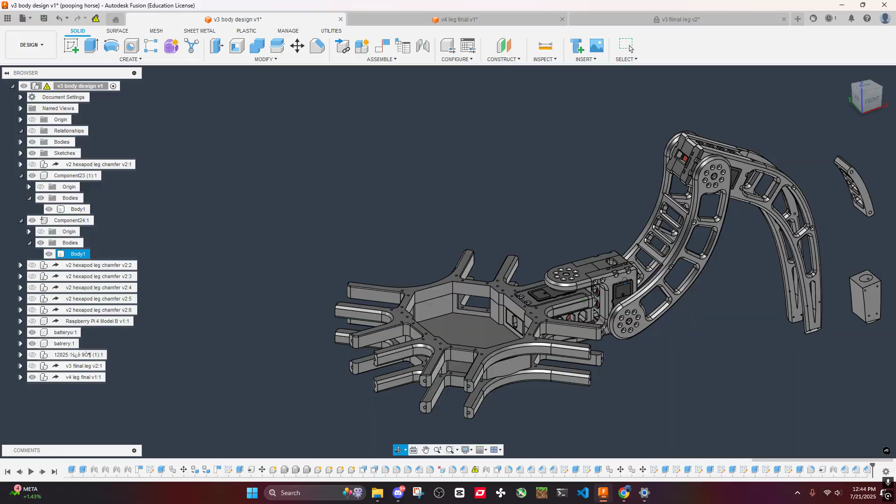To be honest, this bottom meshes together pretty nicely. I feel like the top needs this, but the bottom doesn't, which is probably not a good statement because if the top needs it, the bottom should need it too, but it's okay. I think overall, for now, I think this will be fine.

Maybe we can add some tweaks to it later, but we should have to screw in here, mount here, mount here, mount here, mount here, mount here. Okay, this should be pretty good. And this actually reduces the overall size of this, which is very good.